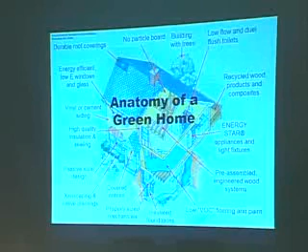We want builders and home buyers to look at this as a holistic system, where you have to make points in every category. You can't do just one thing and say, oh, I built a green house. You have to be concerned about the lot design, the energy usage, and the water usage. Let's take a look at some of these features here.

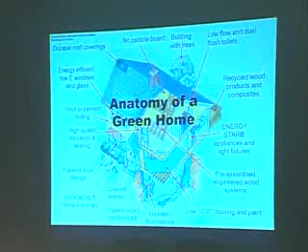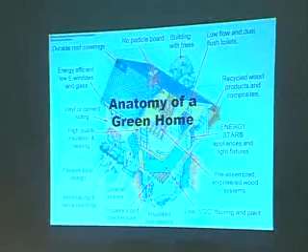Recycled wood products and composites over here on the far right. There's several ways you can score points in all these systems. One is that you use recycled products, or products made from FSC-certified sources, where it's guaranteed the wood came from new growth forest, not a forest that was there for 200 years that we went in and clear cut and stripped the land. It has to be in a managed forestry plan, with the lumber coming from a managed forest in some way. That will score you points.

It will score you more points if that was produced locally. What do you think local means? 500-mile radius, right. So if we're getting lumber from a managed forest within 500 miles of where we're building a house, we score more points for it. Or if we're buying from a supplier within that 500-mile radius, we get points for it. You'll get more points if you know where your products came from. So it's not just how the house is built, it's also the materials being used in that house.

Let's look at some of the other ones here. If that house has Energy Star appliances and lighting fixtures, you will score points in all these systems. If you use pre-assembled engineered wood systems - this is under Green Built more than LEED - you will score points for using these engineered pre-built lumber systems. Why do you get points for that? You use less wood, theoretically. If I set up a factory running wall panels down an assembly line process, I can buy lumber and cut and assemble it with less waste. My only concern is that not all of those facilities are necessarily using new growth lumber, or low VOC glue and sealants during construction. But we're starting to rate them on those bases also.

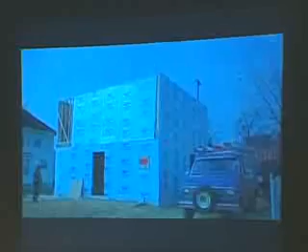As you can see, we've come a long way. We've got the lower walls built, and that's insulated below the foundation too. We're working right now on the last front wall, and we're building the center wall right now too.

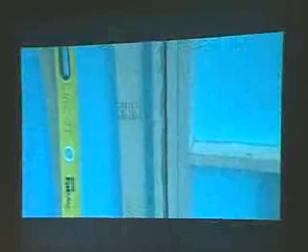At our corners, we turn a 2x4 sideways so we can get insulation back in there too. Otherwise, the way they used to do them, they would block them up solid, or sometimes hollow, and get dead airspace, which would cause air to move around in there and you could get mold in your corners. This way we can get full insulation in the corners.

Another part of LEED homes is trying to be conservative on how we use our wood. We want to not put wood in that's not necessary. In the older days, we used to put extra cripples in at each end of our sills and at our headers. Here we didn't put them in, because every time we put a piece of wood in, it's a heat loss — we can't insulate it as well as if we could get insulation in there.

After we got done with our sealant package, we foamed our penetrations. We went around and caulked the floors and caulked everything right up, and at that point we had everything pretty well sealed up. Then we were ready for insulation.

They came in and blew a cellulose insulation, which is a very recyclable green product, made from recycled newspapers and phone books. We put that in our wall — it packs in very nicely and fills every part of the cavities, making a very tight fit.

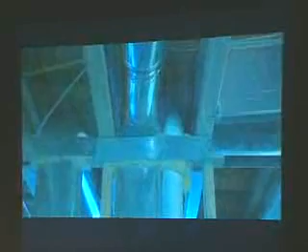Once we were inside here, we had to get our mechanicals done — heating, plumbing, electric. But with our heating, we had to change a few things to comply with the LEED program. We had to add tape to the joints of our ductwork to seal them up, and we had to caulk our cold air bays to seal them up.

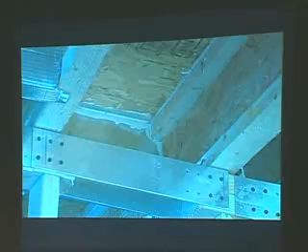We don't want to get contaminants from other parts of the house spread out through the whole house, or dust and dirt that they could pick up through different leaks in the ductwork. And we want to keep the house healthy and as environmentally friendly as possible. So we want to really concentrate on those kinds of things in this house.

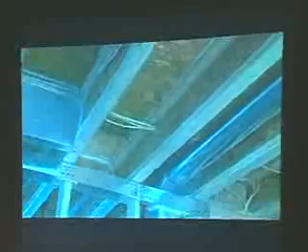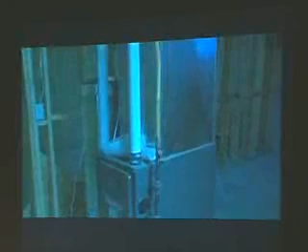Now we're down in the basement of our LEED home. Here we have a 90% gas furnace. This is a natural gas furnace, basically 10% more efficient than your average furnace. It's vented by a PVC pipe versus a Class B metal chimney. We have two pipes here, one's an exhaust and one's an intake. The intake brings fresh air into the combustion and helps keep it more efficient.

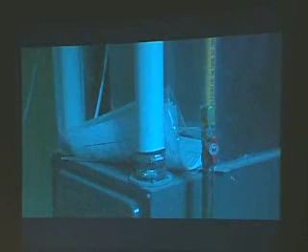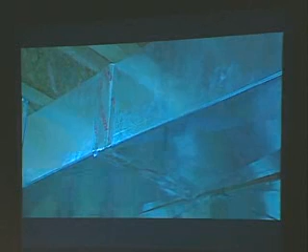As you can see, the ductwork here has been caulked and taped. That's to help keep everything sealed up, keep the heat where we need it, and keep the contaminants out. On our house, we have all the hot runs taped and sealed up, but this is something that's not done on the normal house today. Like this ductwork here, where it's untaped, all it is just our drive clips and S-clips, and you can get leakage at all the corners here. By taping this up, that seals all these corners and seals everything right up.

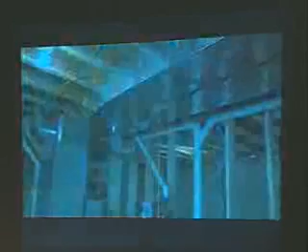Before we got here to install all the ductwork and the furnace, we had to go through and do what's called a manual J calculation to figure out what size furnace we needed. This furnace here is the smallest furnace made by the heating companies out there. They're eventually going to have to start developing some smaller size furnaces. As LEED becomes more popular, the houses will be more energy efficient, and smaller houses will need smaller furnaces.

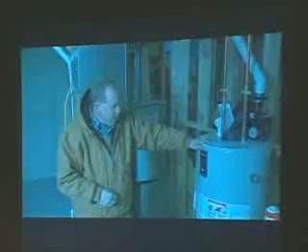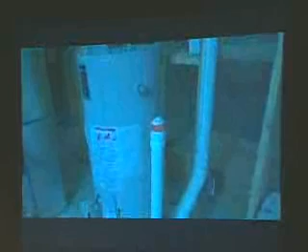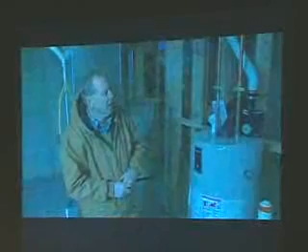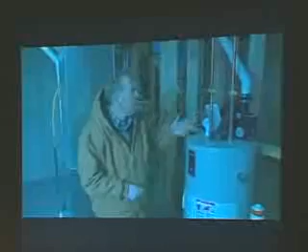Over here we have a 40-gallon hot water heater. This is natural gas. It's a power vented system, and by saying that, I mean this system is very efficient. It does not have a metal chimney, it has a plastic chimney. It's vented with a fan system and plugs into the wall, so it's electronic fired. This is an instant electronic ignition—it does not have a standing pilot that's burning gas all the time. By being an energy efficient system with a PVC exhaust, the burner in here is much more energy efficient. It has to burn more of the gases.

On all these LEED improvements we've been doing, if you were to add up everything—the hot water heater, the furnace, the insulation, the energy framing—you could spend an extra $1,500 to maybe $3,000 depending on how involved you got with it. There's a lot of other systems you can do in homes to make them more energy efficient and healthier, but that seems to be kind of a rule of thumb for the average home out there.

The 13-watt compact fluorescents replace the equivalent of a 60-watt incandescent bulb, so it should really save her quite a bit on the electricity bill. And we've got some high efficiency appliances—a gas range, and of course all new appliances. So all the new appliances are much more energy efficient than the old appliances.

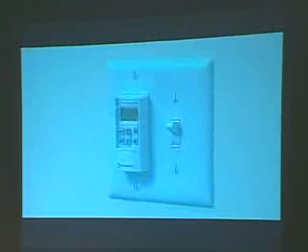We've done a few things with water here and there. We put water saver shower heads and water saver aerators on our faucets, so it cuts down the gallons per minute that these faucets put out.

We have a programmable thermostat that is very homeowner friendly, very simple to set and program, so she can set it down at night. If she wants to turn the heat down at night, it'll automatically do that for her. She just has to program when they go to bed, when they get up in the morning, or if she goes to work, she can have it turned down at that point too. All those little things will help save energy for her and save her some money.

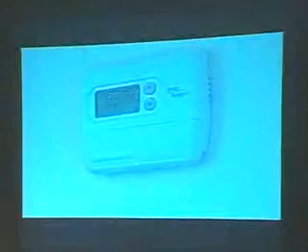Outside here, we tried to take a lot of things into account for the LEED program, again for water consumption, so it helps save her on her water bill. We've kept the lawn down in size so there's not a lot of lawn to mow. We've done a lot of wood chipping and a lot of drought plants.

Most of the wood chips, I'd say half, came right from here on site when they ground a big oak stump in the back. And three-quarters of the plants or more came from on site. They had a lot of daylilies and lily of the valley that we've transplanted around the house and along the fence. A lot of the rocks we put in the landscaping came from on site. All things, again, to save money and to save water.